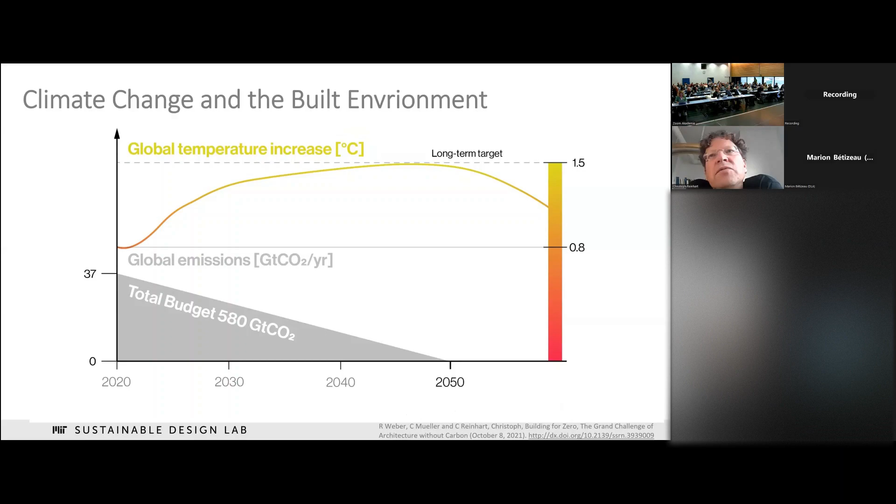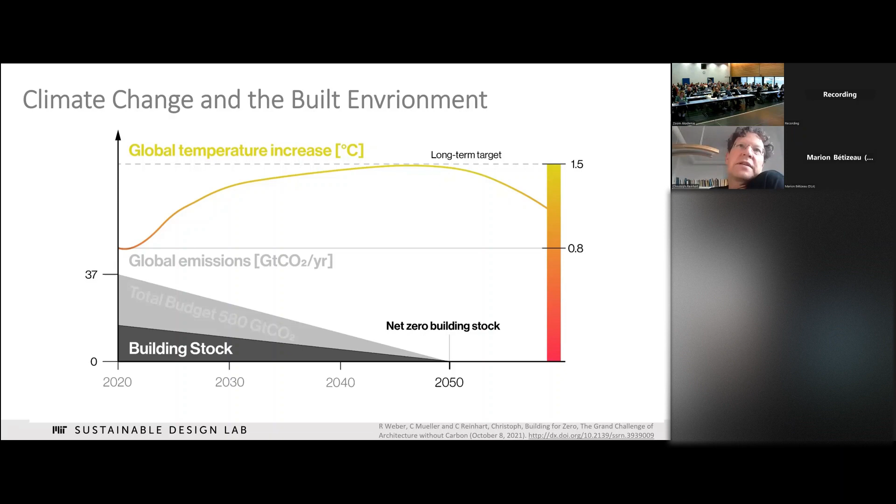I'll start off spending a couple of minutes framing the problem. Anybody working in the built environment right now will have to answer, and we have some good insight into, what the relationship between climate change and our field is. Here's some quick numbers: if we really want to keep global temperature rise under 1.5 degrees C, which seems increasingly unlikely, we have a total budget of 580 gigatons of CO2 left until 2050, and then the whole global economy has to be carbon neutral. If we say 50% of our carbon budget can be used for buildings, then in a nutshell, we have 300 gigatons and 30 years left to make the global building stock carbon neutral.

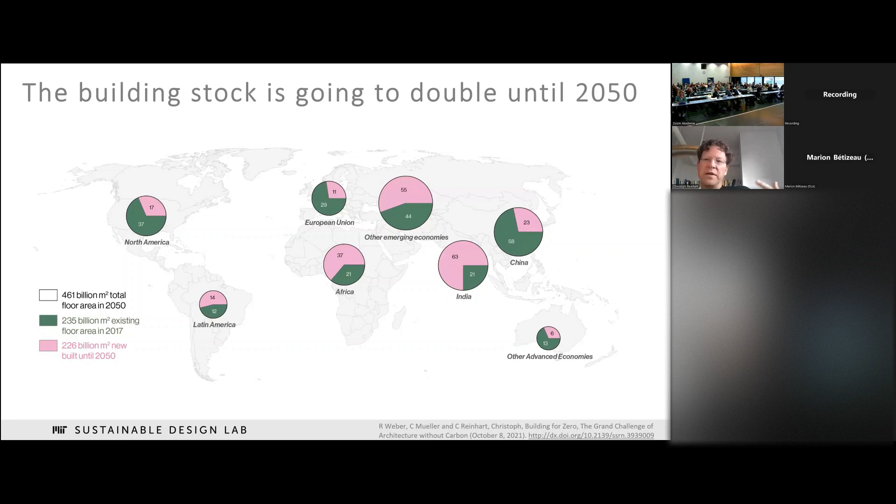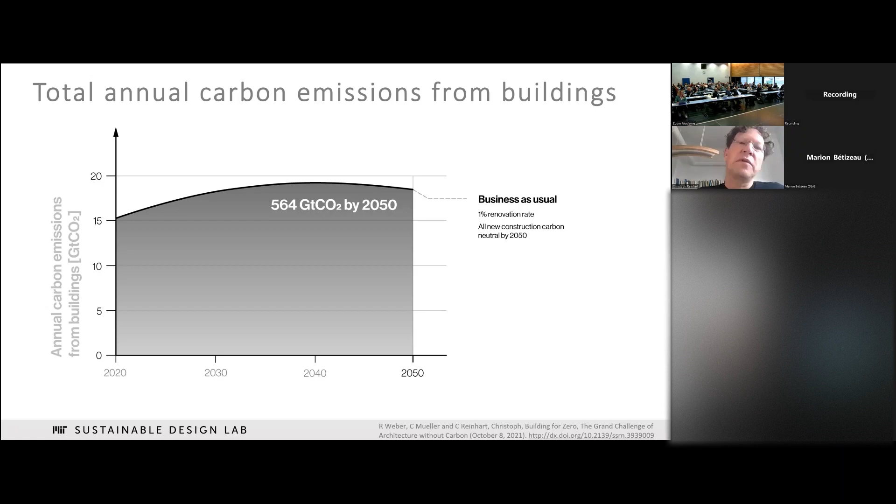Looking at the global building stock, it's a good time to be an architect because we think we're going to double the built area in the next 30 years. So we have to deal both with the built and the unbuilt world. If we're looking at a more business-as-usual scenario, right now we are renovating globally about 1% of our building stock, and with the current rate of innovation in the building sector, maybe by 2050 we have net zero overall buildings, operational and embodied. If you look at that, we're going to burn through humanity's whole carbon budget just with buildings, and we're not going to get anywhere. So we need some really drastic measures: we have to increase the retrofitting rate for existing buildings, deep retrofitting, to 5% per year by 2030, and we need all new construction carbon neutral by 2030.

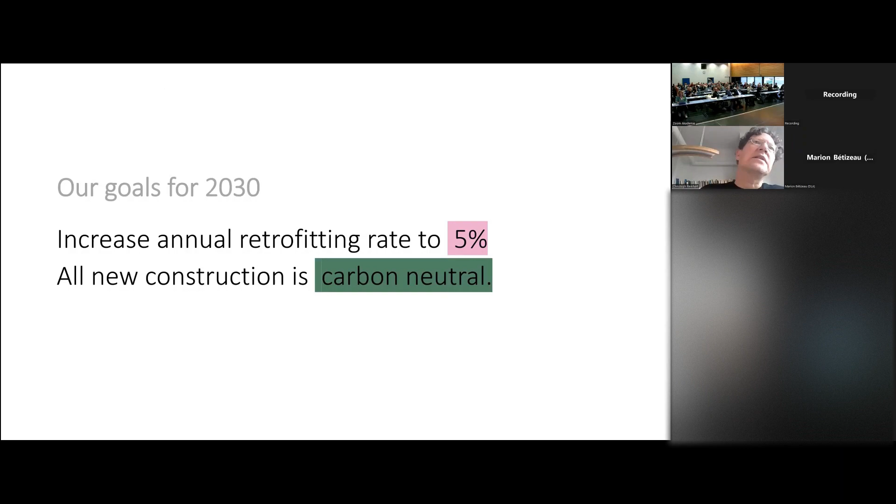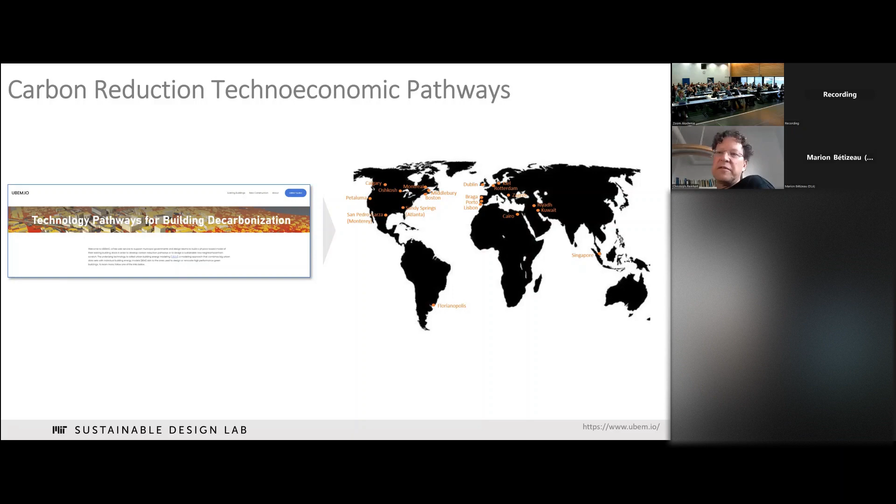Our lab has really been focusing mostly on the first part, but I only have one slide on this. If you're interested in helping your city develop carbon reduction technology pathways, we've developed this web app called UBEM.io. We've used it with municipalities and city governments in 20 cities across the globe, and I think it's ready for prime time for people to just go to the app and work through this process.

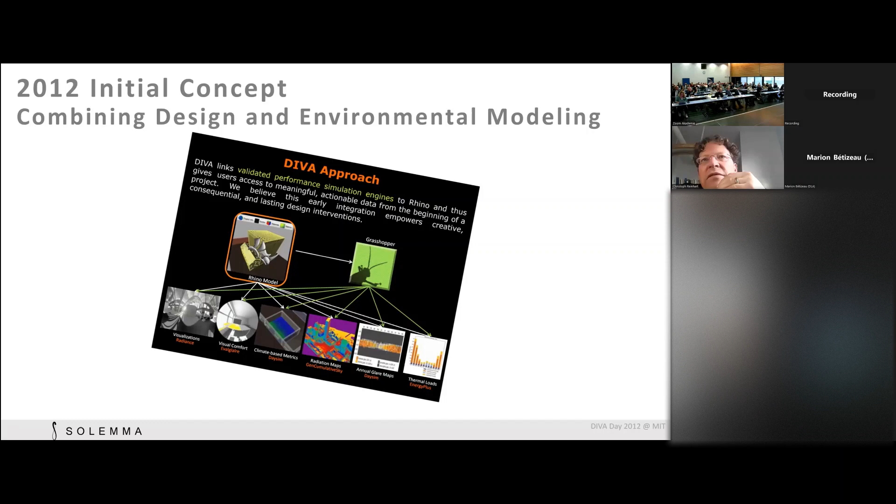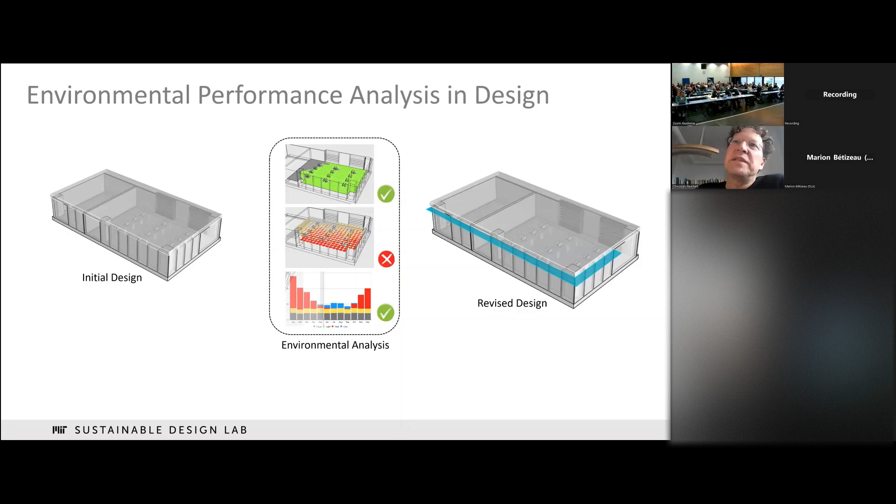Now I'm pivoting to look at new construction and carbon neutrality. Our lab has long been interested in how we educate the AEC sector to get towards net zero. Many people have, for the last 12 years or so, looked at approaches linking architectural design tools such as Rhino with environmental performance analysis software. There's a key purpose here: we take an architectural idea, we do an analysis, daylight is good, glare is bad, energy is good, for example, and then we react to that and take care of the glare as well. For many years we've been as a group thinking about how often this happens in practice.

10 years ago, we did a survey where we asked firms who we knew use energy simulations in-house or with consultants how often the simulations for daylighting or energy have an impact on their design. There clearly, when you have in-house consultants, there's a better communication pathway.

We redid this survey in 2018 with a very large AEC firm, one of the leading sustainability firms, and the results got worse, actually. There was a feeling that even though we are doing all of the simulations, we are not changing design.

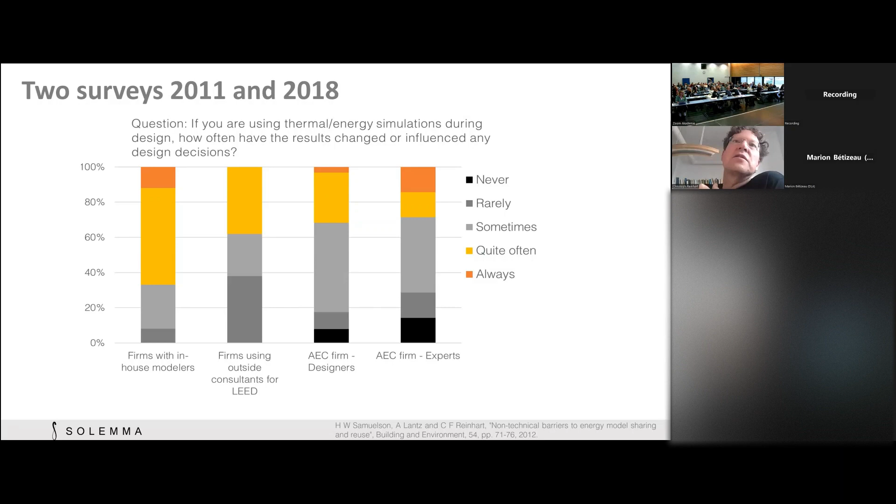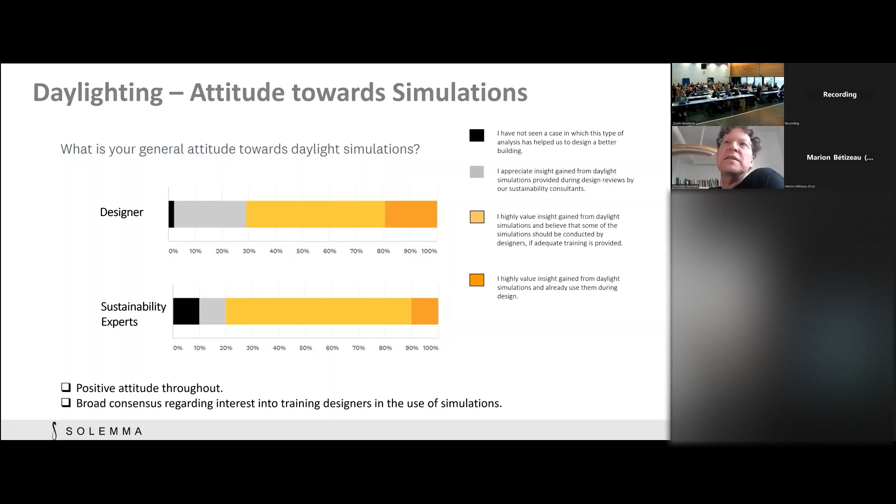So we wanted to see if there's an interest in change. We did follow-up questions looking at how open designers are to doing their own daylighting analysis, and there was overwhelming interest in doing the analysis themselves to have a more intellectual flow while designing a facade or massing. Similarly, designers were interested in doing some thermal performance analysis, though the experts were a little more careful there.

Overall we took that as a cry for action, and we said we want to act now. 3.5 years ago, we started what we call the Solemma Product Advisory Group. We work with 19 firms—some you might recognize, some of the largest architecture firms in the US and Japan, some smaller firms and manufacturers, AEC companies. Our process is meeting every month for an hour, really talking about how they're using the tools.

We come up with new ideas out of fundamental research and see, is this something you would adopt? How would you adopt it? How does this create value to the design process?

1.5 years into that process, we released ClimateStudio, a plugin for Rhino, which is now used by 400 schools of architecture. Based on a survey we did, it reaches about 20,000 students every year.

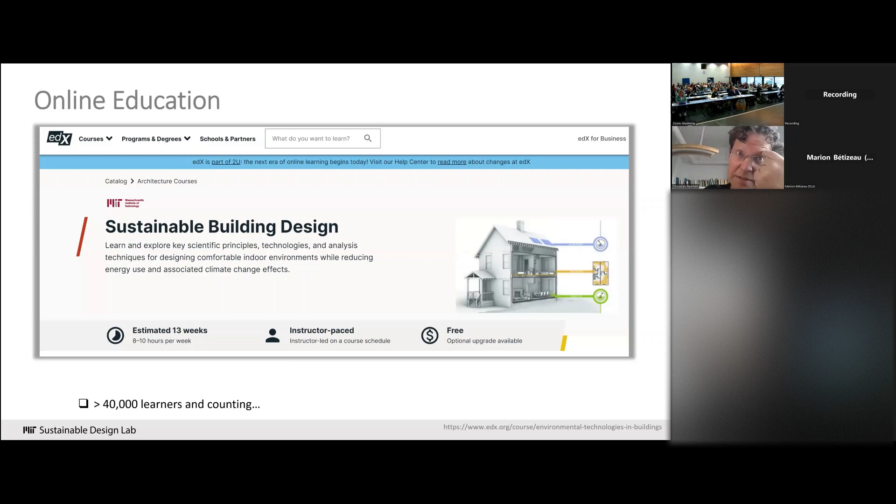In parallel, we have an online edX class, if you ever want to take it or know anybody interested in the topic, that is constantly running. The next controlled version where you can get a certificate starts next spring. We've had about 40,000 people use this, and it's really nice to see this kind of knowledge diffuse into the world.

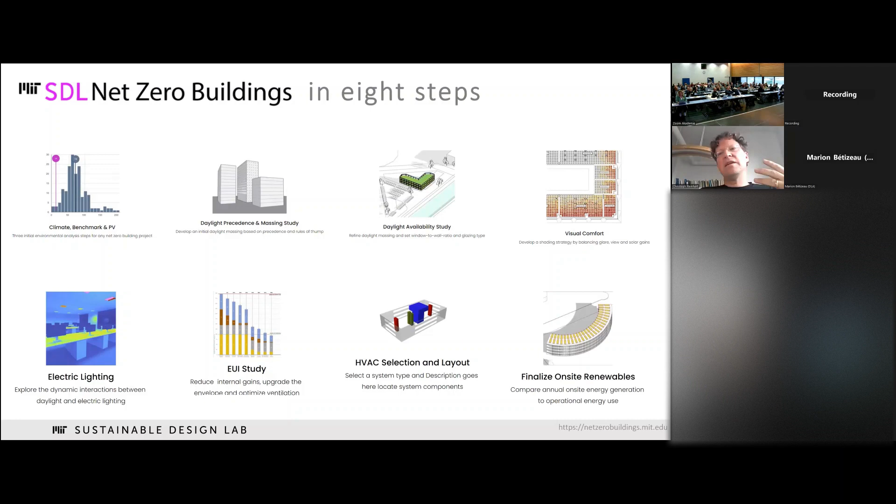So what is our thinking? What is the role of daylighting within net zero design? Within the fall class, I try to get entering graduate and undergraduate architecture students from zero to net zero, so to speak. We have 8 steps that are constantly evolving to help them design a net zero building, and out of these 8 steps, 4 are related to daylighting, since it's, as we've known for a long time, a good form giver—way better than energy for a building.

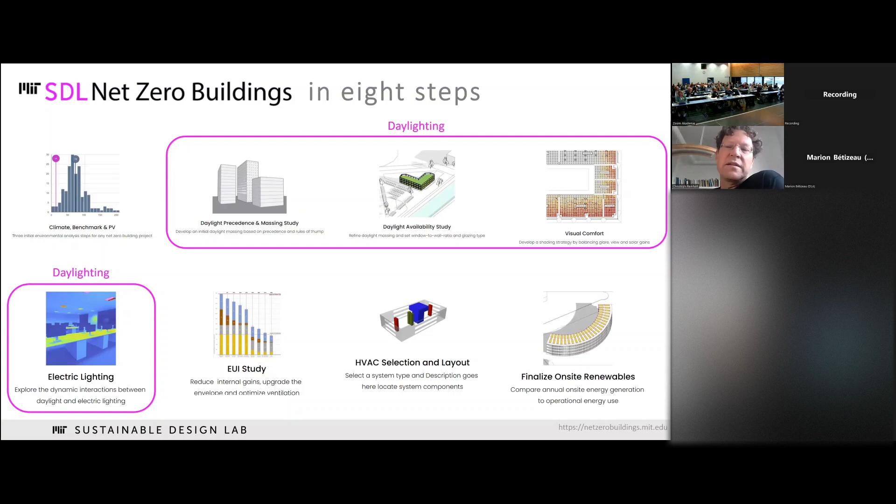I'll walk you through this process quickly. The first ones I just skim over because they're not related to daylighting. If you really have a choice, linking a site to human-powered transportation to reduce commuting energy use is good. Then you need to do this initial balance between what's my PV on-site potential and how much energy a typical building of my type uses, hoping for some overlap so you can get towards net zero if that's your goal.

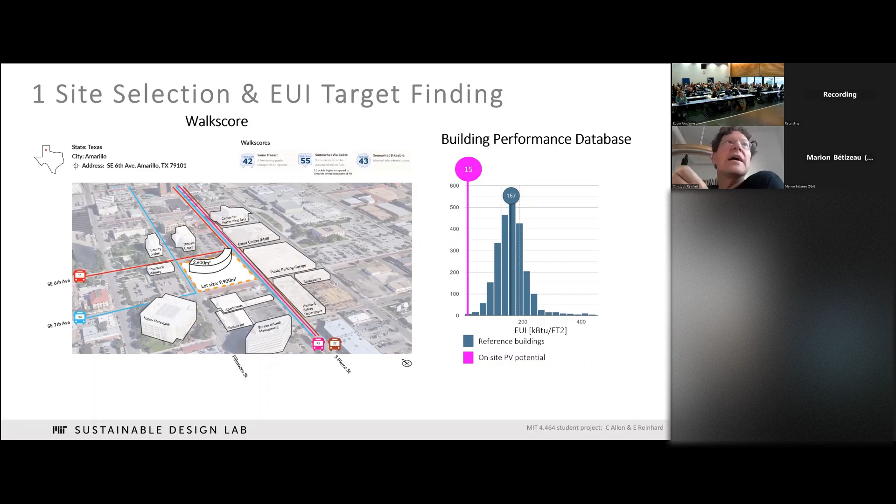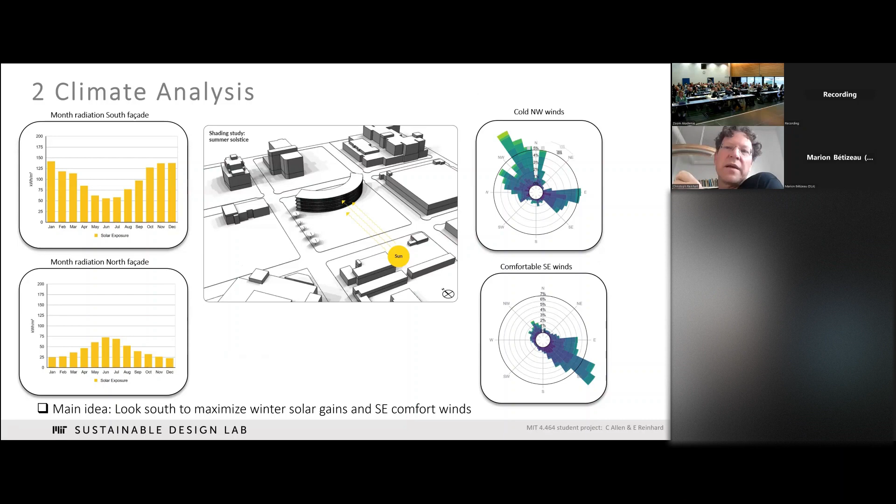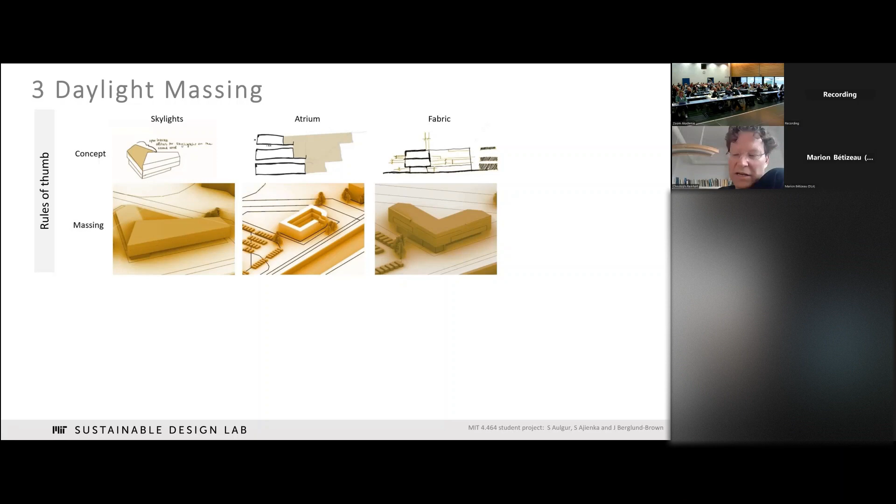Then, of course, doing a climate analysis—not just looking at graphs, but thinking deeply about how a certain aspect, such as solar insolation on a given facade, could change my building. Then we enter daylighting. At the beginning, I'd say don't use any simulation that is just distracting—rather do simple sketches and very simple massing models. If you follow a set of rules of thumb that we share, then when you start doing a simulation you should get a completely green building. If your rules of thumb are used and you have the space on site, you should easily have the whole building daylit.

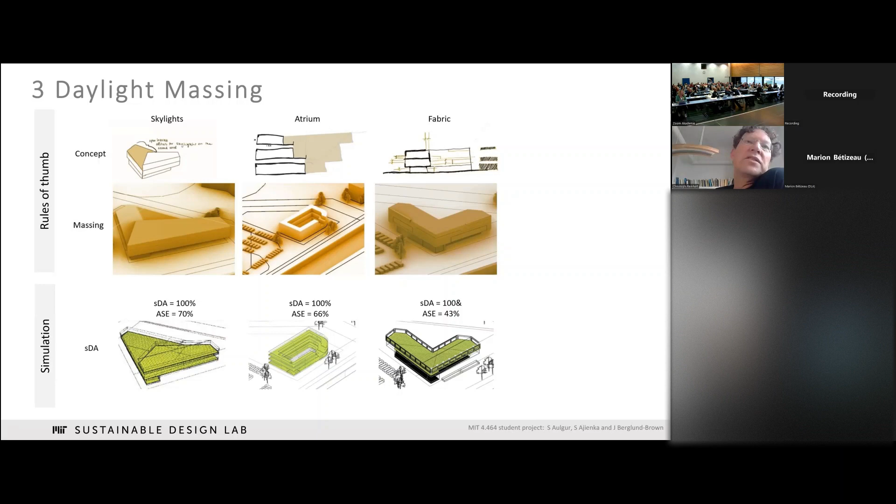Then really the problem is either, let's say, you don't have this much space. Here's a nice study from Shimizu Corporation in Tokyo for a building they just finished. The client wanted this very deep floor plan building, probably due to costs and on-site usage of more floor area, so they used simulations to design a central atrium.

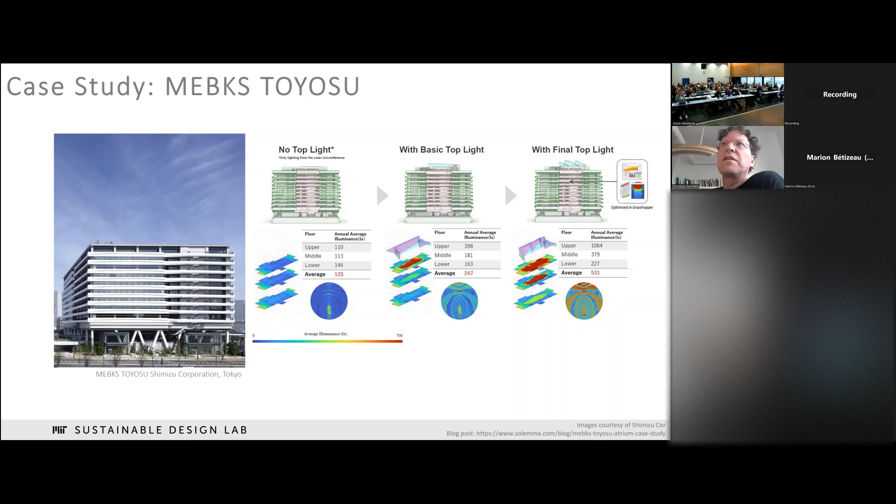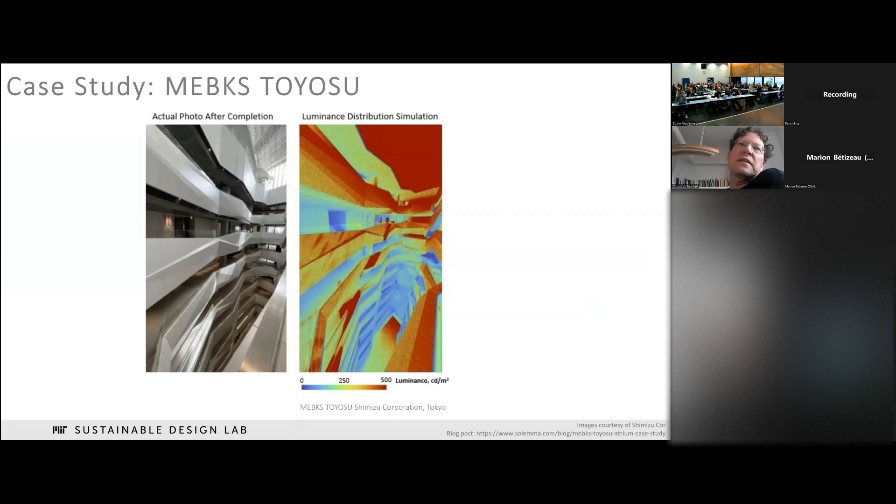They did a total of 40,000 simulations using the Grasshopper ClimateStudio workflow, and came up with this skylight that avoids solar gains while still letting daylighting into the space. Here on the right-hand side you see how the atrium looks from the inside. Really nicely, they went back afterward and looked at their simulations and photographs, finding some rapport between the two worlds.

So this is to get the daylight, make sure that in principle there's enough daylight within the building. But then of course the control starts. How do we make sure this is usable daylight? And this is, I think, a good case study.

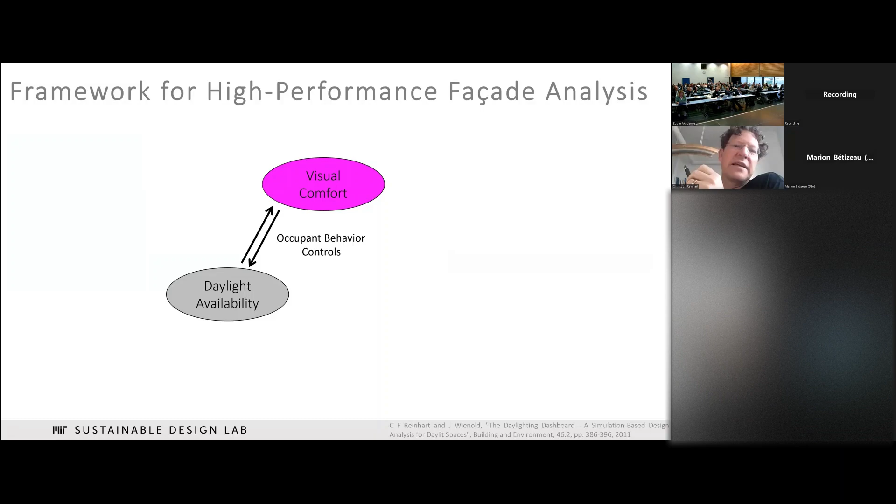This is Lake Flato developing a net zero school in New Mexico. In this design study, they looked at the northeast classrooms. Typically nowadays people start with big windows, the more the better, and then realize that actually leads to an oversupply. So their ASE and UDI are really good metrics to work with to basically close your facade up.

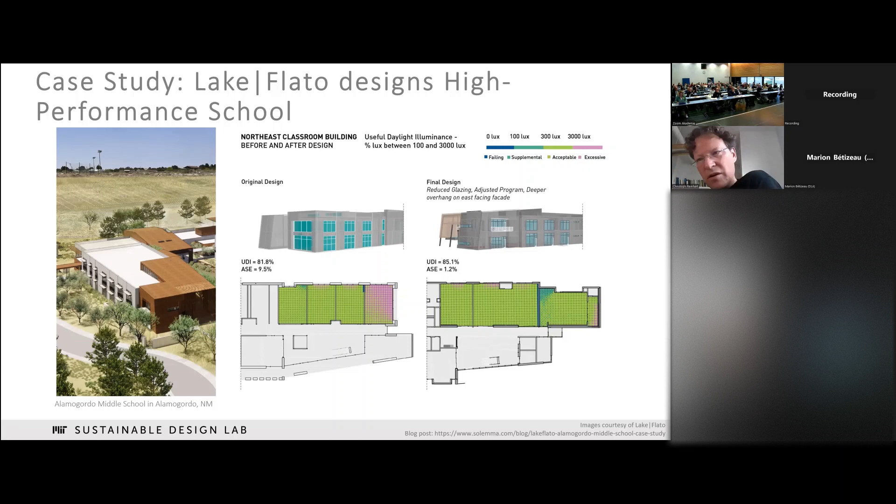So simulations really shine when you want to find this balance between having enough light, being able to still look outside, but not having overly solar gains or glare. And here is a great case study from Studio Ma, a residence hall at ASU in Phoenix, Arizona. Hot desert climate, east-facing facade, and they designed it with this 3-tier approach.

Do I get enough light? Do I avoid ASE levels that are too high? And how do I reduce energy use? Their main facade, which is already constructed, has a sawtooth design, but with the windows not facing south but north, which leads to less overall daylight but more diffuse, distributed daylight, and great reductions in solar gains into the building.

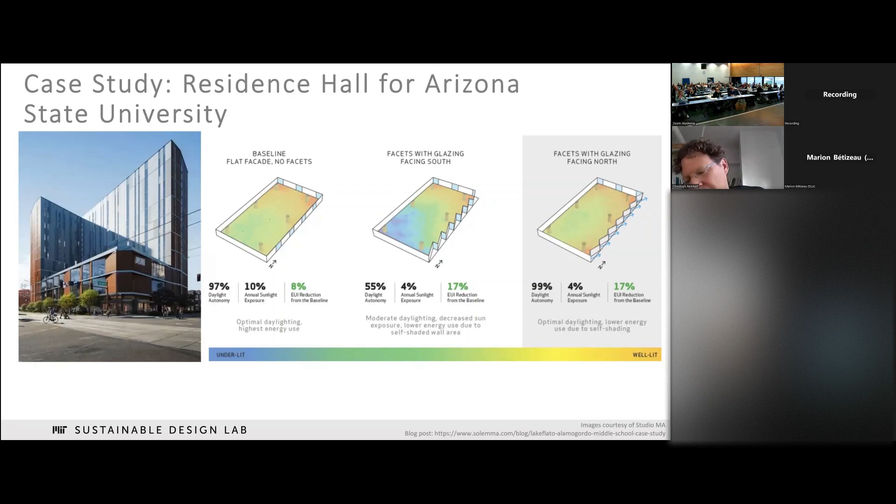So I think this is a good case study of the types of things you can easily pick up in practice. Now I think Jan Wienold in the audience is probably screaming and shouting, saying, well, what about daylight glare probability? Those are, of course, great metrics that take you a step further.

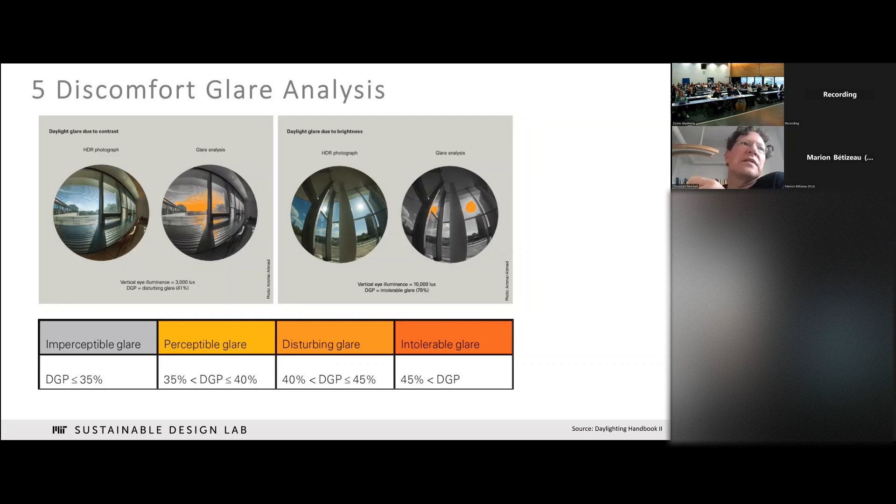You basically look at not only illuminances but distributions within the space, and you can pinpoint if people are likely, due to high contrast or brightness, experiencing glare or not. A big breakthrough overall was that a few groups have developed methods now to do very fast daylight glare probability distributions across a whole space.

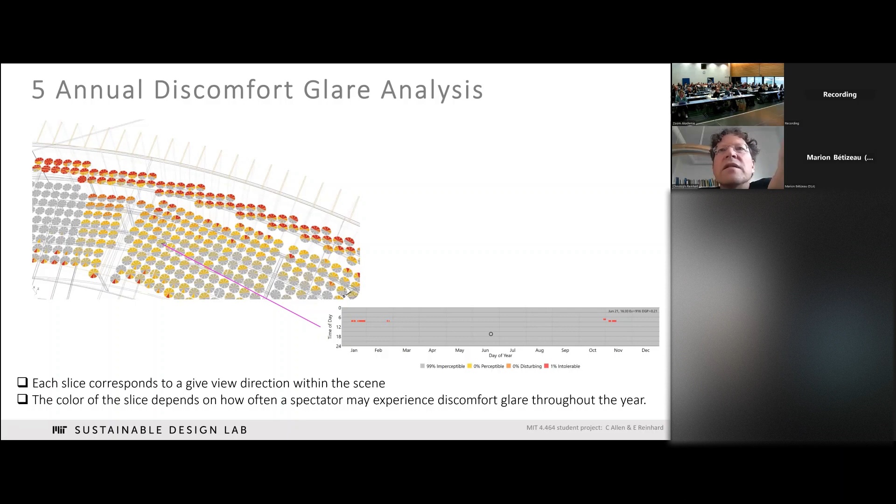The way this looks is you can in seconds create something like what you see here, a floor plan distribution, and for every pizza slice, you see if somebody is experiencing any glare, and if so, at what time of year. Here, this is at 7 or 8 in the morning, very rarely could one say glare is an issue. Similarly, for somebody facing south at this facade, you have basically glare for the whole winter half of the year.

Again, one has to say this is not really a problem since nobody's going to put their laptop against the glass wall. So having some glare in a building is hard to communicate to design principals, which I think is why this metric isn't used so often. But if you have no red at all, I think you have a boring building. So we really have to work on how to communicate glare in a case like this.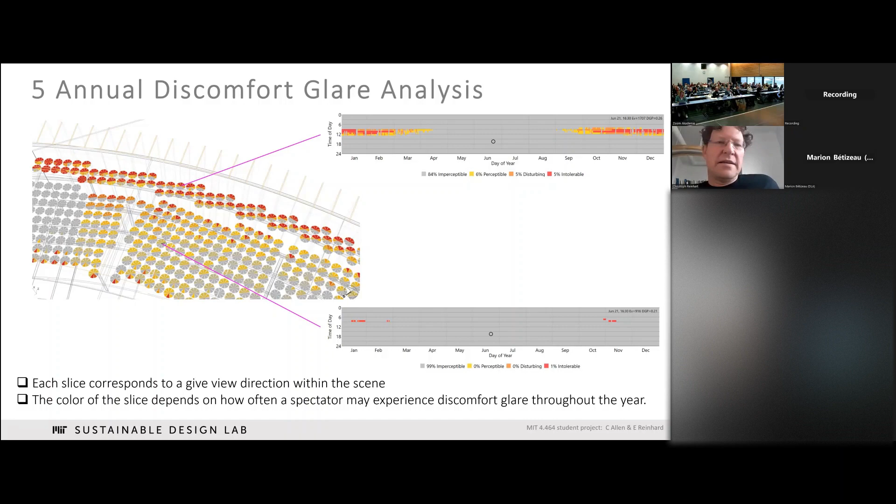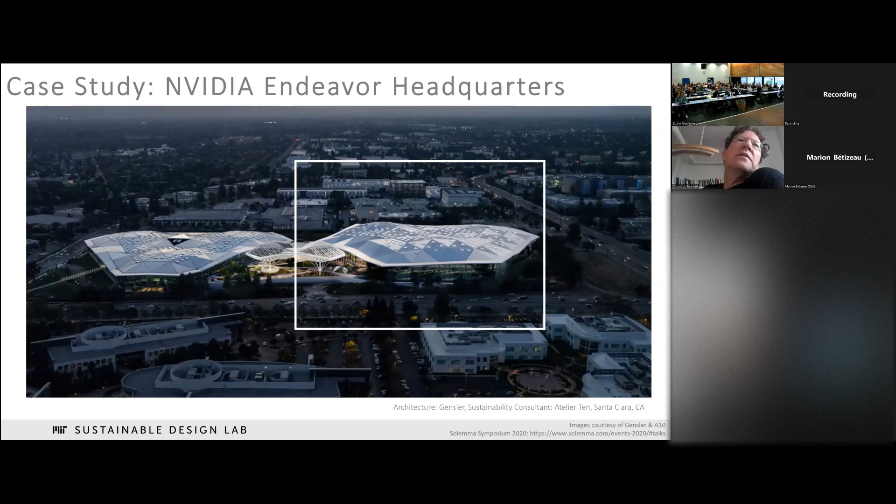Now, the only application I really found here is the NVIDIA headquarters, architecture by Gensler, with Atelier Ten as sustainability consultants. It's one of these typical tech buildings, in Silicon Valley, and you basically have these big overarching roofs which shape the facade.

The goal is that on the inside you can rearrange teams' design and working conditions however you want, all the time. And you have a roof that takes on the role of glare protection, hopefully letting in enough daylight and providing view.

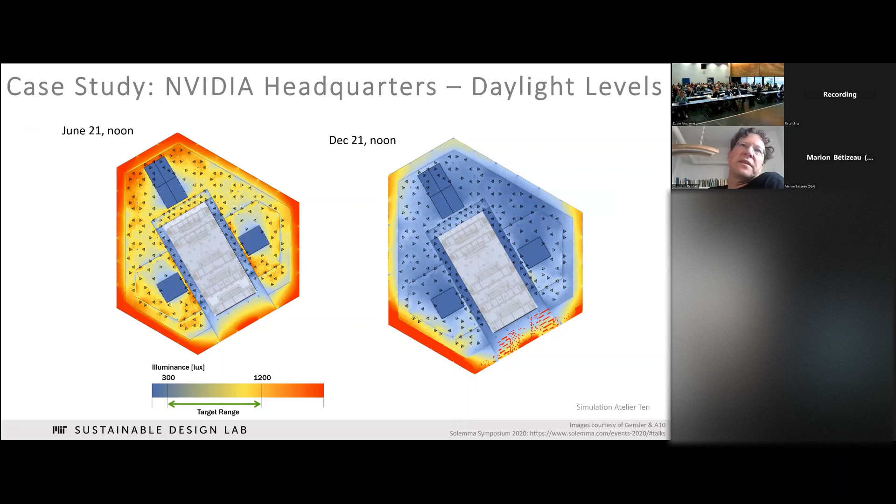The way the analysis worked from A10 is that they looked mostly at summer and winter solstices, checking if they get their target illuminance ranges in the space, which they got. They started doing this analysis for strategic corners too, and of course once you have a low sun angle, a space like this is completely flooded in daylight and you have a lot of glare.

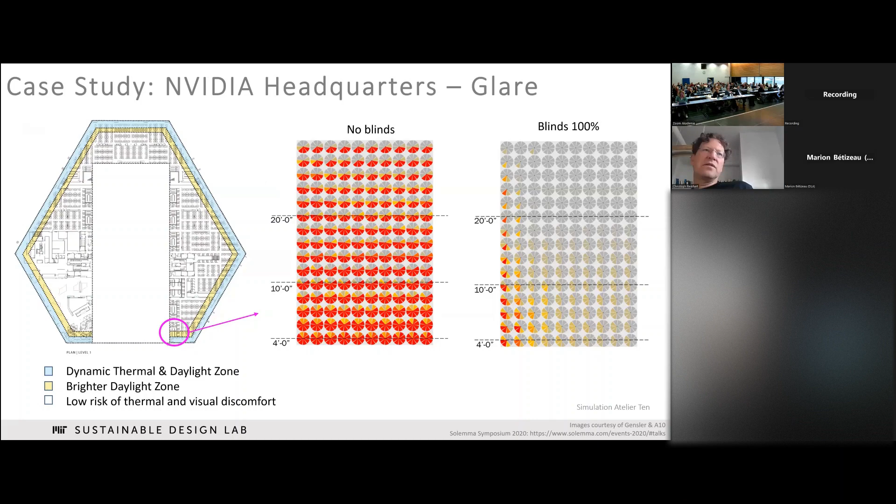So you have to start thinking about some dynamic shading systems.

Now quickly getting into view analysis, that's of course a hot topic right now. I'd like to give a shout out to Stefano Schiavon at UC Berkeley, who organized a really excellent online symposium last year. All the presentations are online. Then we met in Berkeley with a few of us a couple weeks later and developed a plea for more window view quality research, which many of you are involved in, as is that Lucas paper.

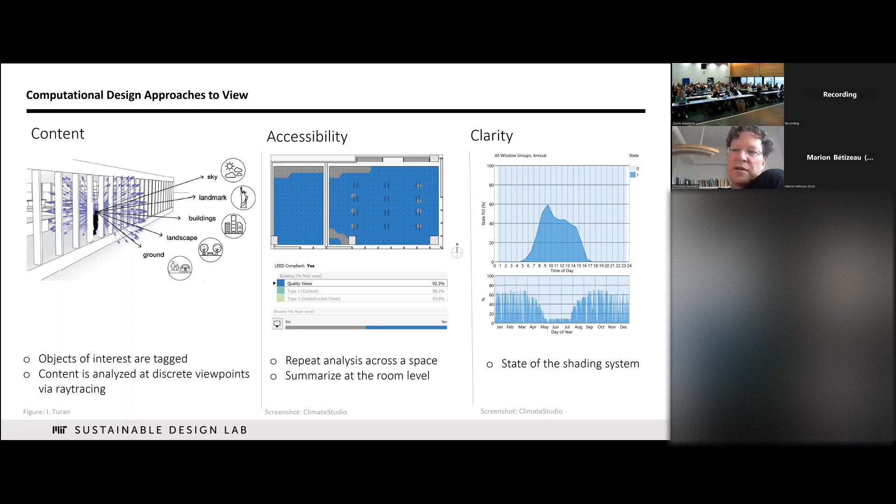When it comes to view, from the computational standpoint, that is pretty simple. You have to basically identify content objects that you want to see from the point of view, then quickly assess whether you can see these objects from within a building, and then think about clarity - is this line of view being obstructed or not? So this is really easy to do.

But we are at a point right now where we are not sure these are really good view metrics.

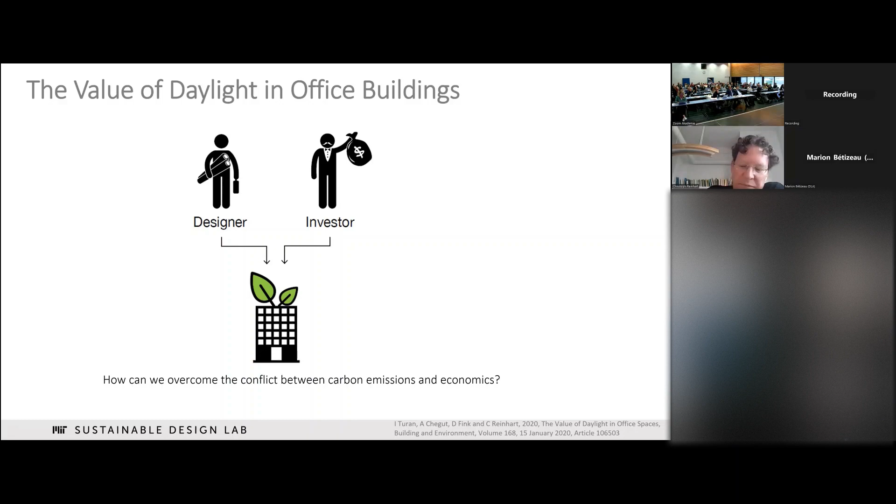This is the work that probably Velux wanted me to talk about, so I'll cover that quickly - though I talked about it already at another Velux symposium. This has two parts, both work by Irmak Turan, a collaboration with Andrea Chegut from the MIT Real Estate Innovation Lab, where we said we should really take the financial analysis tool and the design performance analysis tool used during the design of a building and put them together.

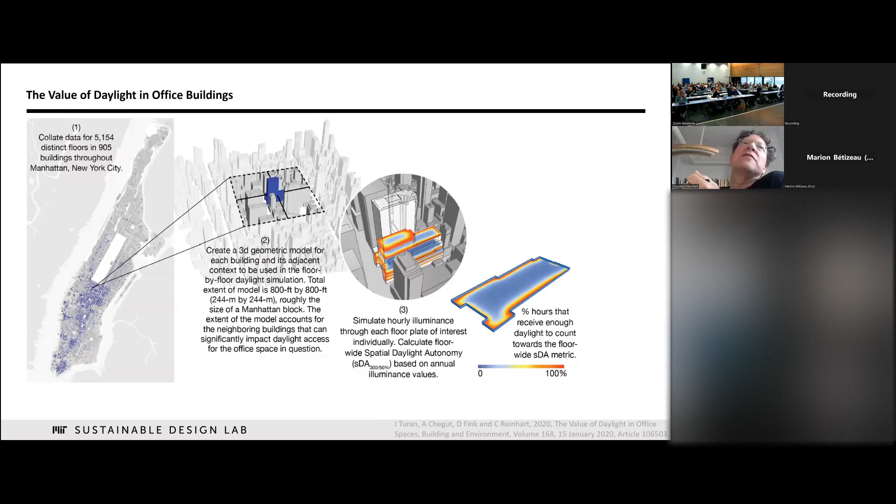During part one, we had rent contracts for 5,000 spaces in Manhattan. We did daylight autonomy analysis for all of these spaces, and then tried to predict the rent value based on a hedonic pricing model, which takes typical real estate parameters into account, as well as access to daylight. We found a 5 to 6% premium for daylight, all else being equal.

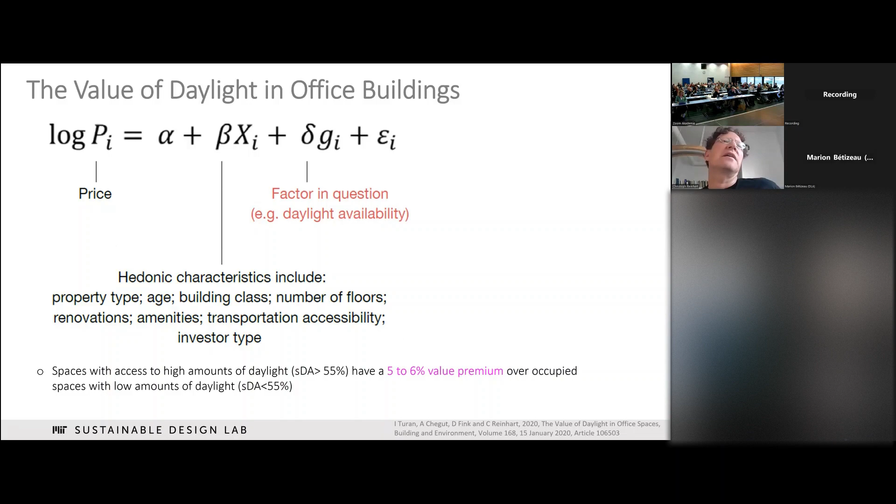Now the second part that I hadn't talked about yet, which came out last year - we also added a view metric. So we had a combined daylighting and view metric for these spaces. Since we don't have an established view metric, we used it as an opportunity to come up with some first definitions for a view metric.

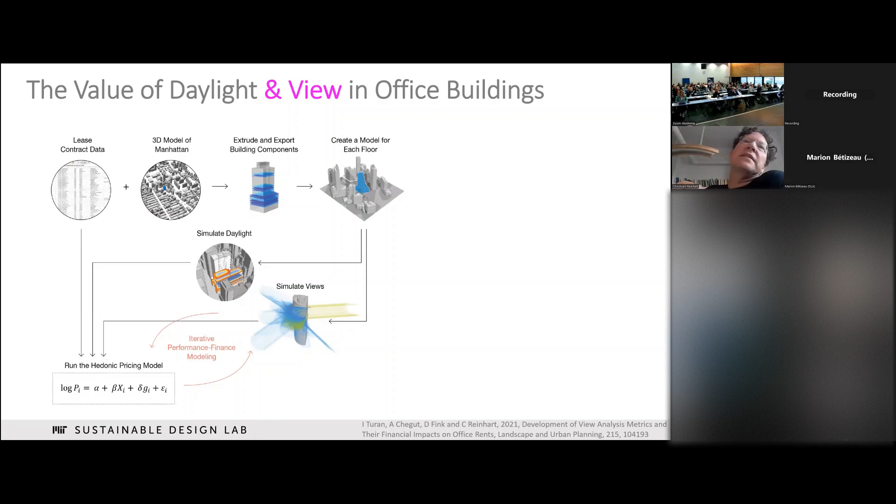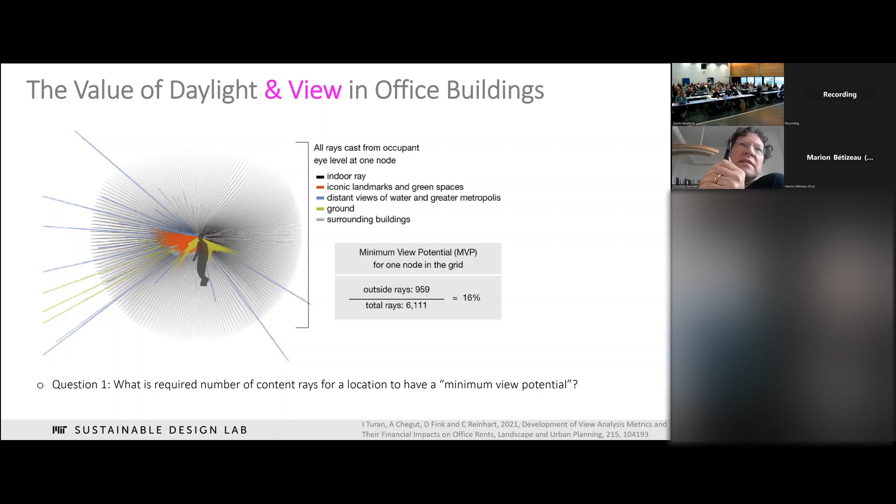The way we did this is we first said, very simply, to have a minimum view you have to see content that is desirable. In our case, in Manhattan, that meant iconic buildings, landmarks, the ground, distant waterways, and so forth. That's one knob - how much of the desirable view do I need to have? The second part is how much of my floor has to have a view for me to think of it as having a view.

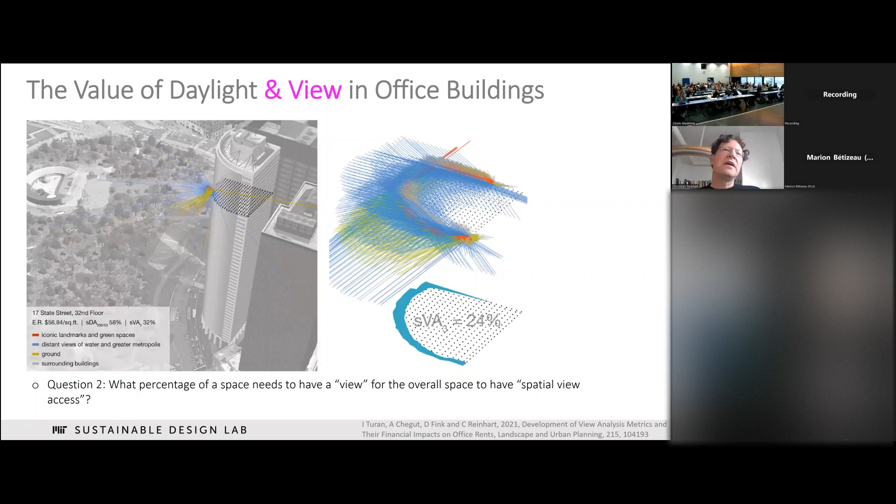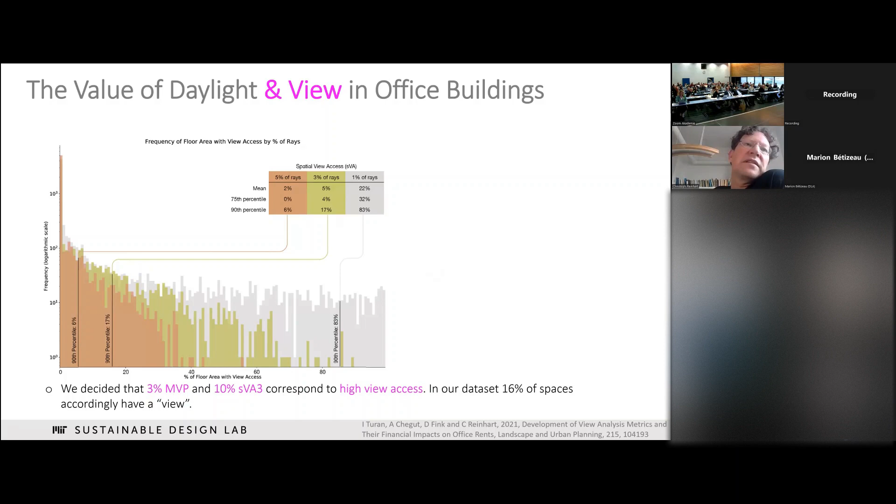It turns out we did this parametric analysis where we tweaked these two knobs, and we found a winning combination for Manhattan: if 3% of your view is desirable and 10% of an area has a view, then you have a view.

In terms of rent value, what that led to is: if you have good daylight or you have good view, you get a 6% rent premium. If you have both, you still get a 6% rent premium - so there's no extra bonus there.

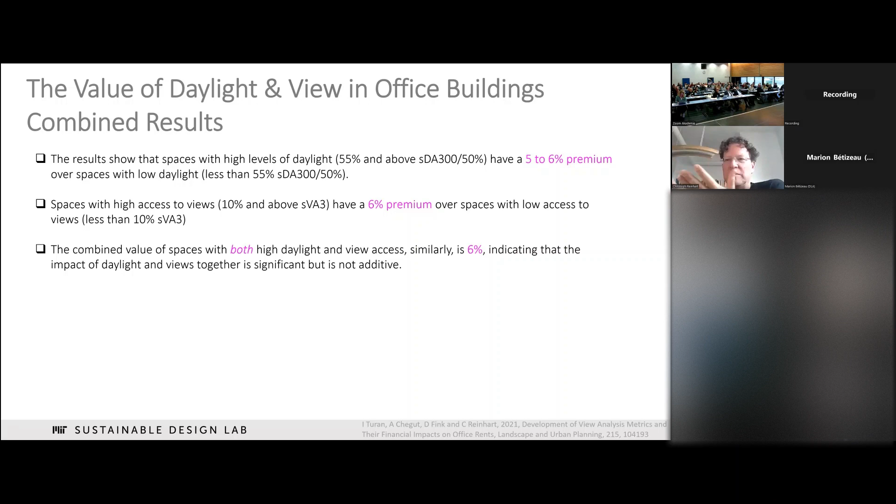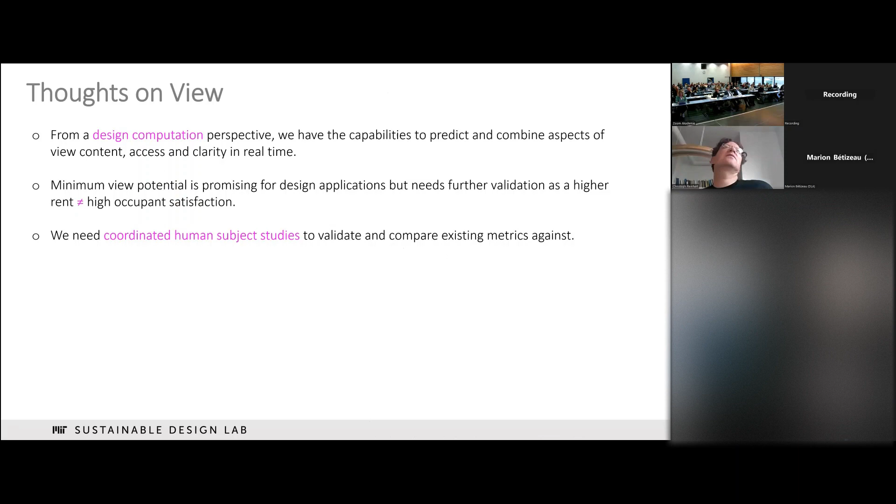How reliable is that for architectural design purposes? I don't know, I'm not sure. This is just a metric that works for what people are willing to pay for a space. We obviously need coordinated human subject studies to further validate that.

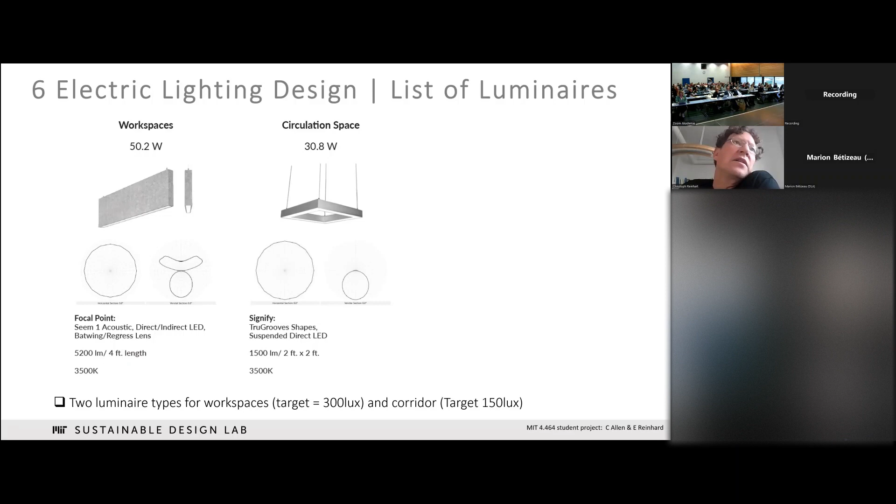I also want to quickly mention electric lighting at a daylighting symposium, but it's of course key to integrate this nicely. We are working with Pacific Northwest Laboratory with Department of Energy funding on basically reinventing electric lighting design. The typical process would be in your architectural model, you place your lighting objects, and then you see if the illuminances are properly aligned with what you need.

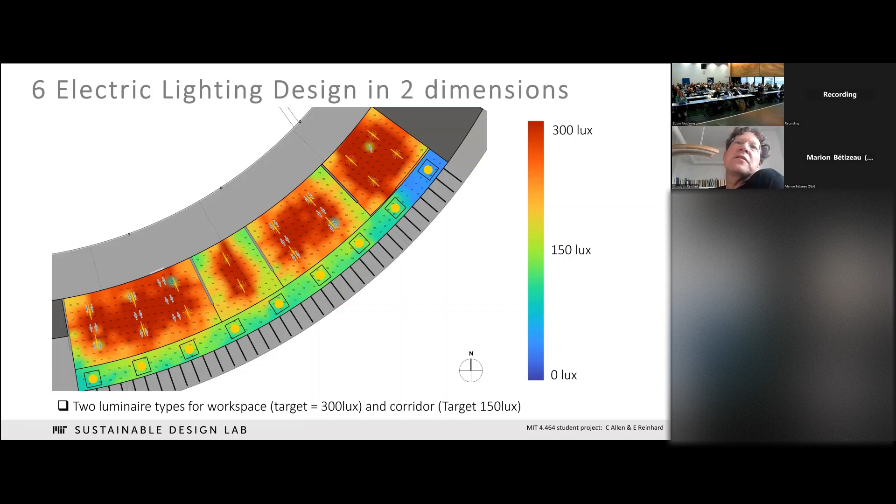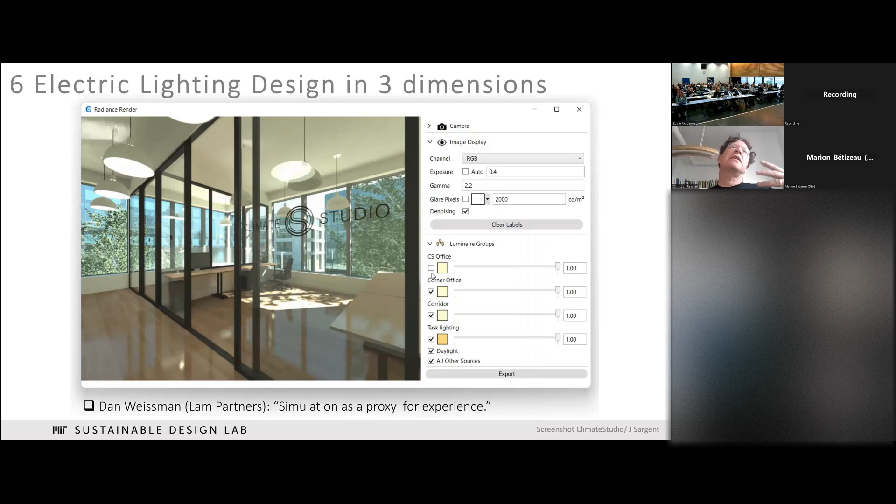This is something we've been working on, and the lighting design firms we're working with really like it. It's basically a composite image you can generate with a click of a button, and in post-processing you can turn the daylighting on and off, dim the lighting within the space, and change the temperature of the light sources.

We feel that really starts getting you into the space and shows the full potential of LED lighting, where you can make all these changes and see how a space is going to feel anytime, with an analysis like that.

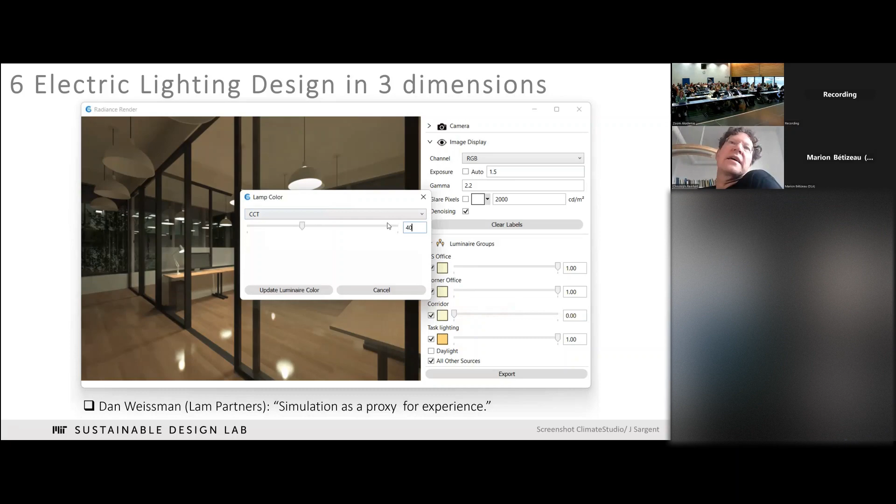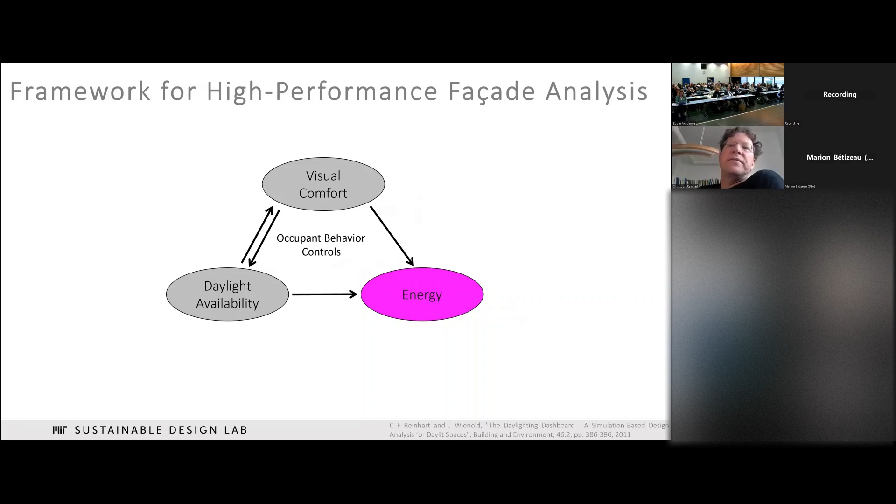And then, of course, the natural extension of this is that we are adding 81 color channel simulations for melanopic analysis as well.

I'll really quickly jump through the notions of energy use. Once we have a well-daylit space and know when the electric lighting is on, typically you can embed this into a full energy analysis of a building, and see from the baseline that is code compliant, you can basically bring the energy use down until you're under your PV potential. Then in principle, you have a net zero building.

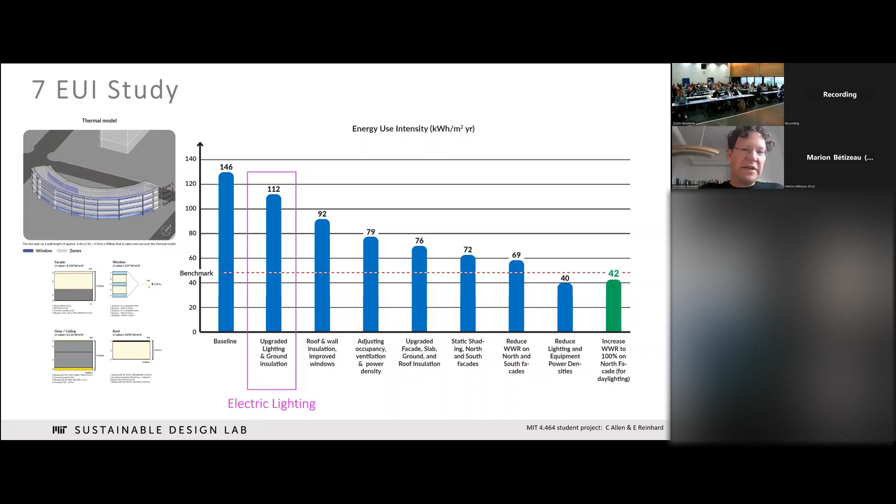Two more minutes. I wanted to also show one example of a project that Ramon Weber, Caitlin Mueller, and I have worked on together, about the notion of reducing embodied energy along with operational energy.

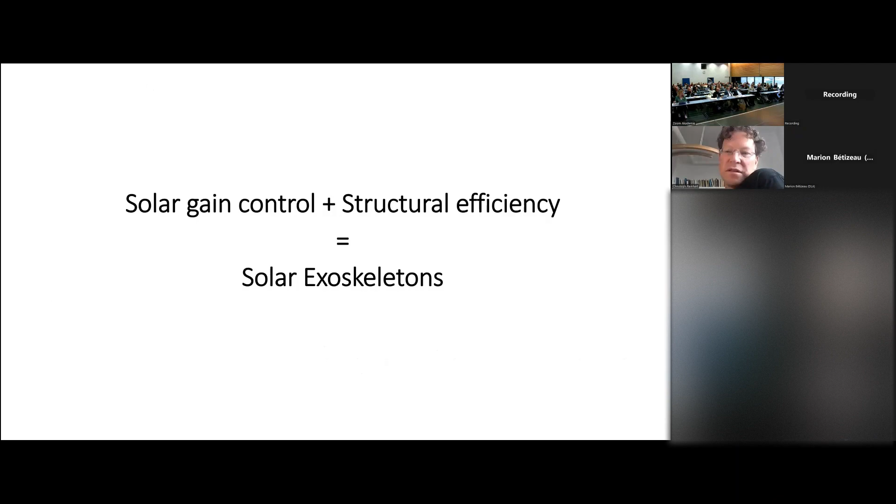If you switch that around, in either steel or wood, you can build solar exoskeletons that double function as a solar control device, and they hold the whole structure of the building so that you have maximum flexibility on the inside.

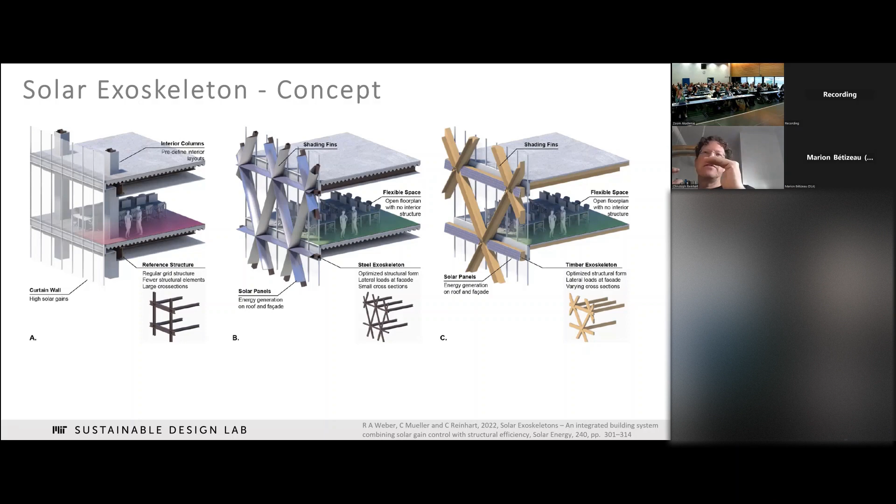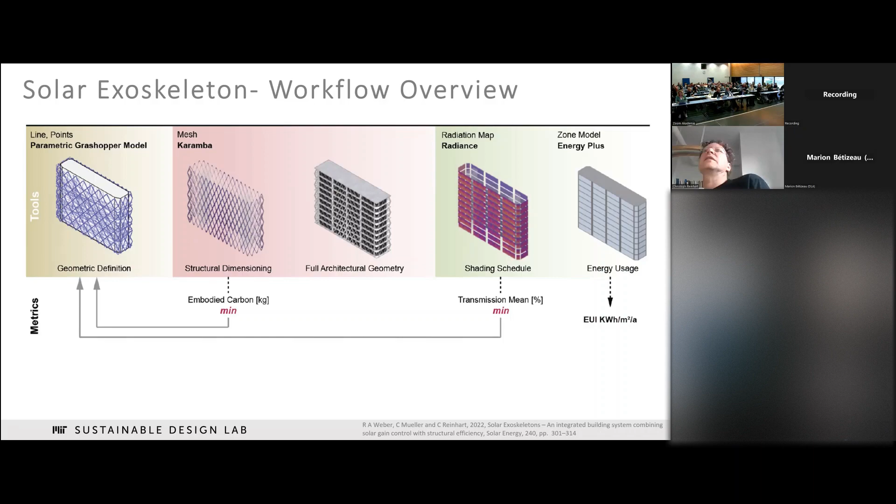The way this then looks is we have this workflow that we recently published that is accessible for all. You basically start with a parametric model of your building, then do a structural dimensioning so the sizes of all elements are strong enough to hold the building, which gives you an architectural model, and finally a daylighting and energy model of the whole space.

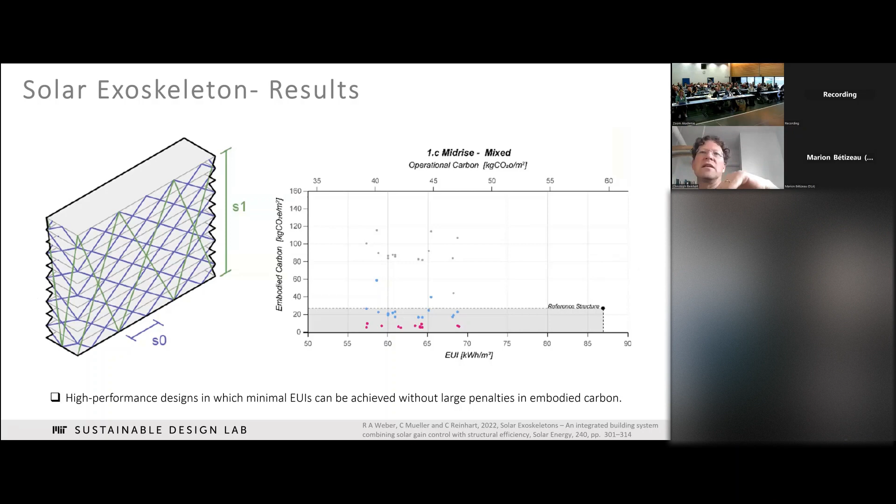I'd say the key result I want to leave with you is that with these kinds of approaches, you can decouple optimization of embodied energy from operational energy use, so you don't necessarily have a trade-off there. All the solutions in pink show the wooden construction, so we can dramatically reduce the embodied energy content of a building and then also optimize to push this into the lower left-hand corner overall.

So in summary, where are we today? I think when we talk about daylighting, it's an important part of building design, and it positions itself fruitfully towards the whole concept of carbon neutrality by 2030 for new construction. I think we have a lot of tools right now to empower architects and their consultants to develop these types of concepts, and practitioners are picking this up very quickly.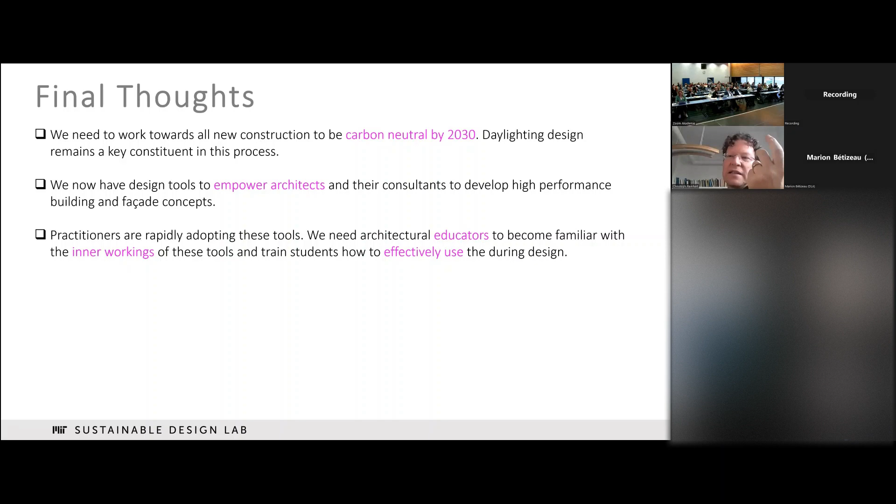My plea is really for architectural educators to also become familiar with how these tools are working and what their limitations are, and how you effectively use them in design, because I think there's a lot of button pushing going on, and it's not that easy, as we saw from the first part of my presentation, to actually convert results into actionable design choices. And with that, I thank you.